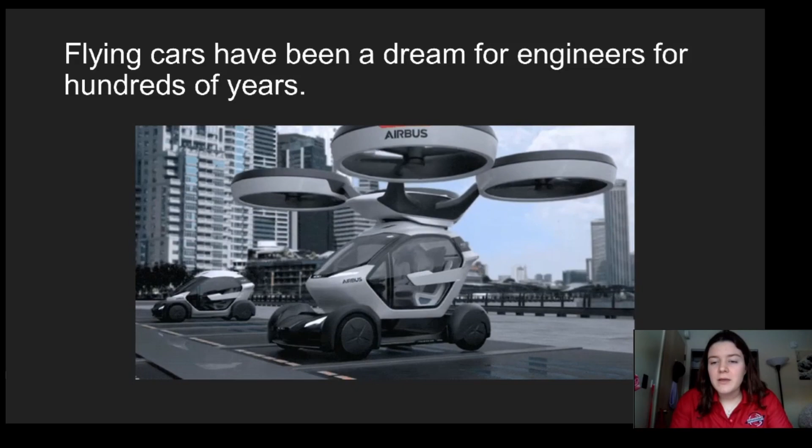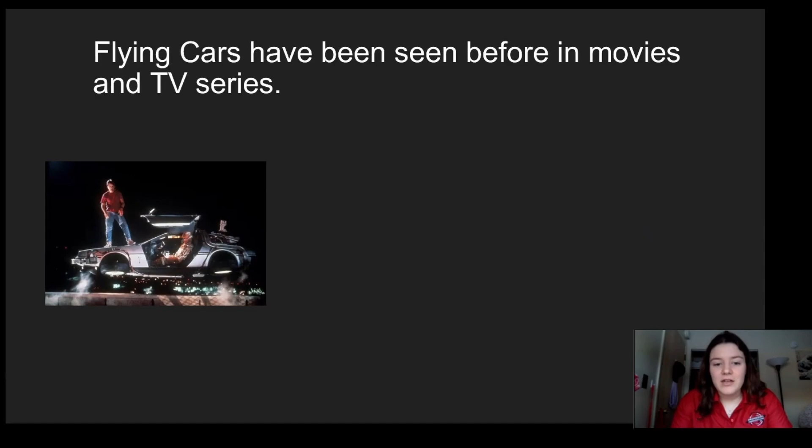Now, you might think that this is way too futuristic and impossible, but there have been examples where flying cars have appeared in movies and TV shows. The first one that comes to mind for me is Back to the Future. There's also the Magic School Bus and Star Wars that are big ones. This concept of urban air mobility is how engineers are trying to make these fictional flying vehicles into reality.

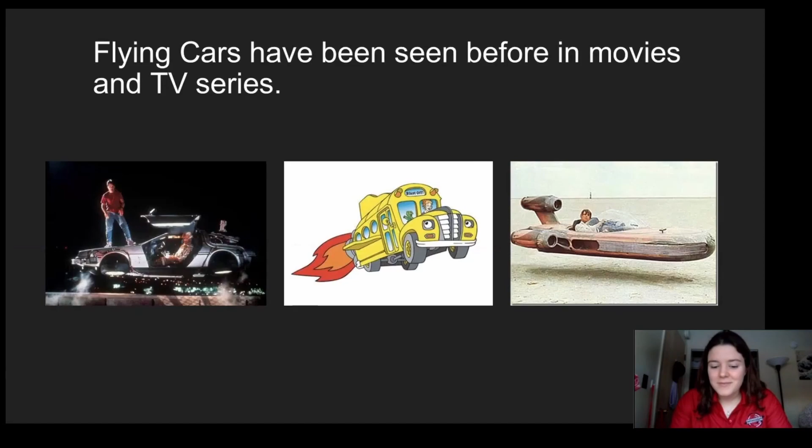So we'll be talking about urban air mobility today. Like I said before, I'm Emily, and Italia is with me, and we're talking about how engineers are creating this new way of transportation to bring people from the cities to the suburb areas through the means of flying cars.

Our presentation is separated into three parts. The first one being urban air mobility, the second one, lift, thrust, and drag, and the last part, the pros and cons of urban air mobility.

Our first topic today is, what is urban air mobility? It is the theoretical name for what is going to be flying cars. It is the future of transportation, mostly its modernization, and it's how people from the city will be able to get home from work after long days, but not on cars or roads, but through the skies and up and above. It's the concept where traffic will be avoided and people will be flown out in a greener way than gas emitting cars.

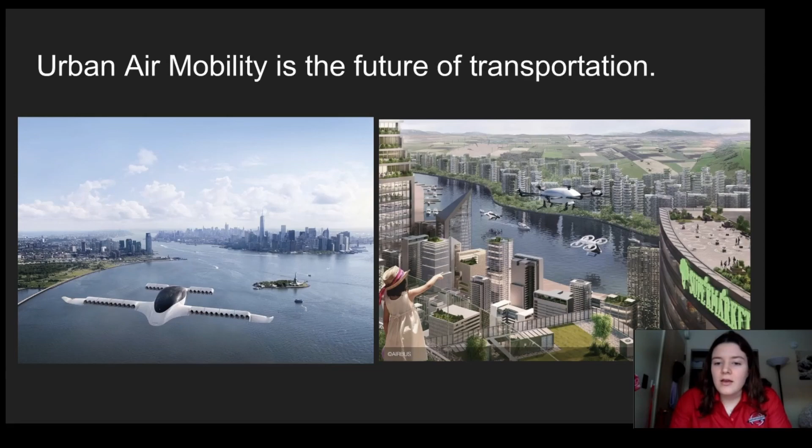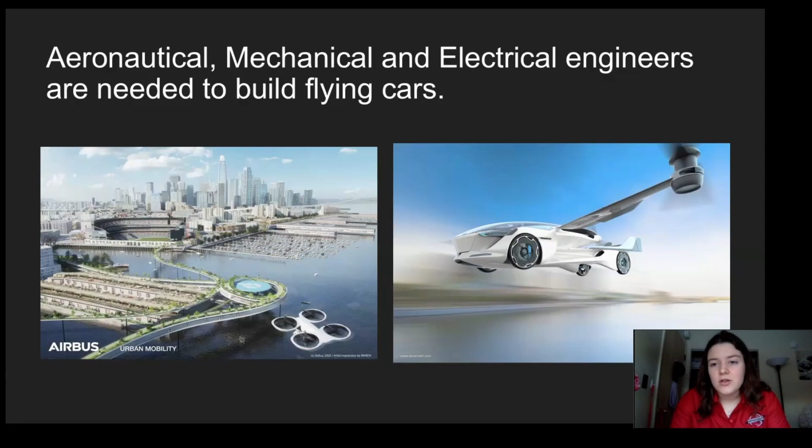There are a few types of engineers needed to make these flying cars. The first would be aero engineers, who are responsible for the aerodynamics of the planes, making sure it's able to fly and stay up in the sky and not fall down. Then there are mechanical engineers, responsible for the motors and engines of the car, making sure it runs. And there are also electrical engineers, responsible for making sure all the systems of the car work together as a whole.

One flying car currently being sold is the Terrafugia Transition, which can fly and drive. The problem is that it needs a runway to take off, which takes away a lot of the appeal and convenience of a flying car. Flying cars will become more popular when we're capable of having a car that can have vertical takeoff, like a hovercraft, but this technology is still being developed. Many rules, investment, and time would need to be made to make flying cars mainstream.

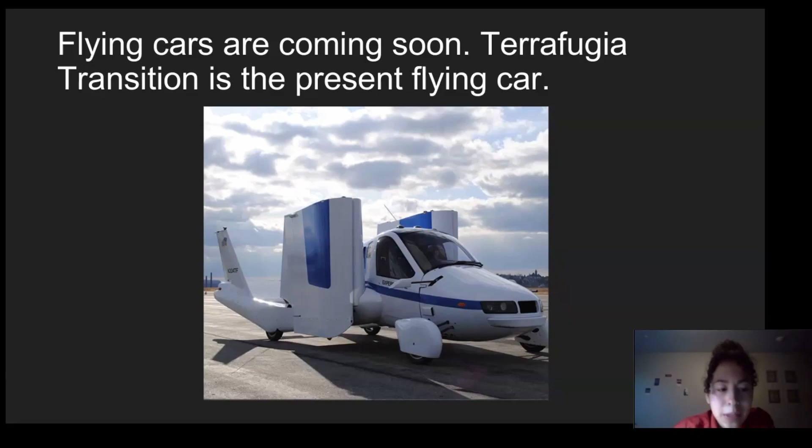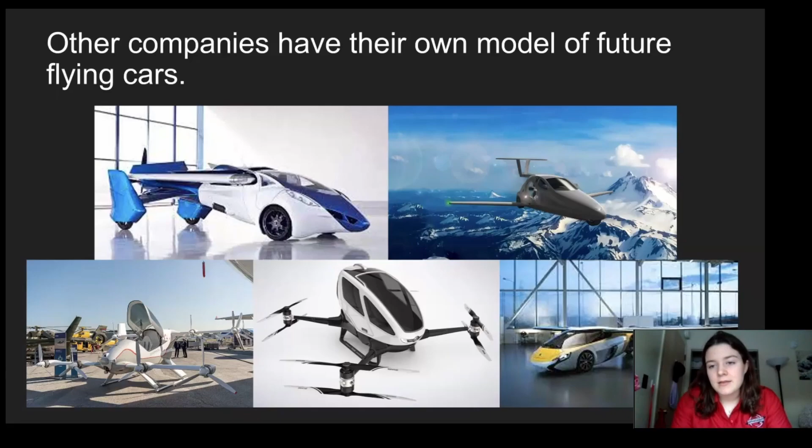All of these cars still require a horizontal takeoff like Italia was talking, so they still take off like this, and the main goal of urban air mobility is to be able to lift up straight and kind of go up and over, which would be best for in-city landing and takeoffs. Now that we talked about what urban air mobility is, the question that engineers are trying to answer is how we can make cars fly.

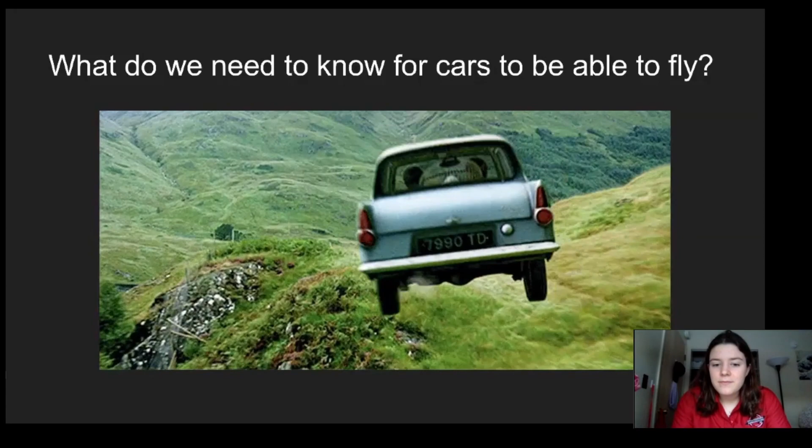So our second topic is explaining the different concepts involved in flying, including lift, thrust, and drag.

First we'll start with Newton's second law, which is a very important equation in physics. Newton's second law is F equals ma. F stands for force, m stands for mass, which is the amount of matter in an object, and a stands for acceleration, which is how fast something speeds up. F equals ma is important because it shows the relationship between forces and motion. It allows you to calculate the acceleration and therefore velocity and position of an object, which would be important if you are going to design a flying car.

This formula tells us that the amount an airplane accelerates is equal to the applied force divided by the mass of the airplane. As you can see with the car in the picture, when you hit the gas pedal, it goes faster because you applied a force. Similarly with the baseball player, the ball is hit with more force and goes farther because he swung the bat with more acceleration.

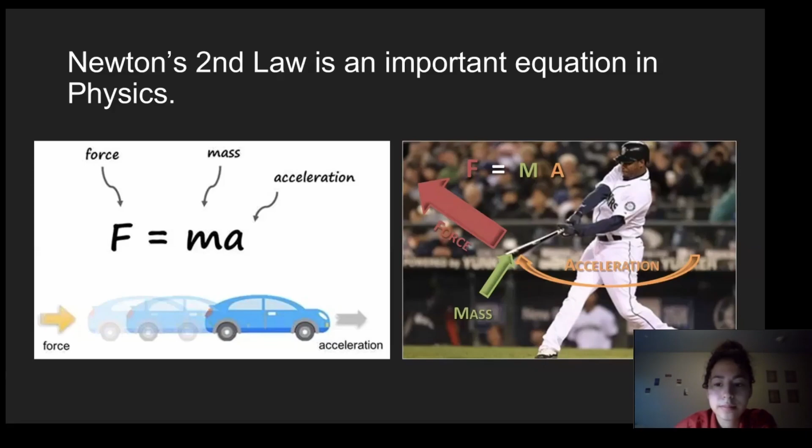Now that we've talked about Newton's second law, we can talk about the fundamental forces of aerodynamics, or what makes a plane fly. First we have lift, which is an upward force that makes the plane go up, caused by a difference in air pressure along the wings. Then we have gravity, which pulls it down, coming from the center of the earth. Thrust moves the aircraft forward and creates airspeed, and that comes from the engines. And drag acts against the airplane, pulling it back, caused by things like air.

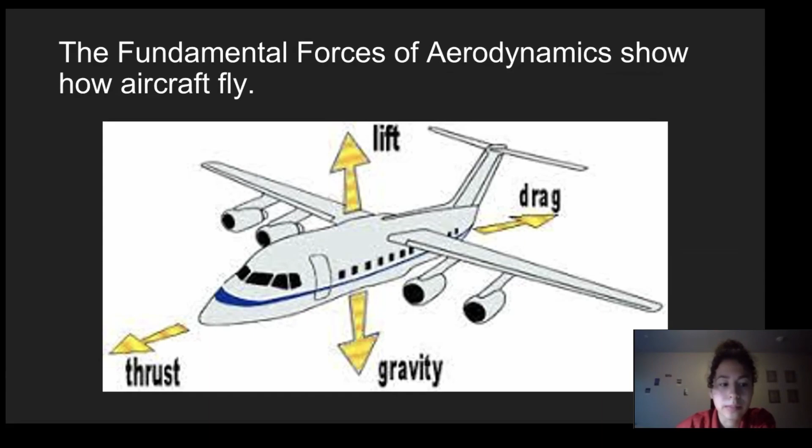The main thing you need to know is that lift must be more than gravity or the plane will fall, and thrust has to be more than drag for the plane to go forward. So as shown by the arrows, you can see which condition has to be higher for the plane to go forward, backward, up, or down.

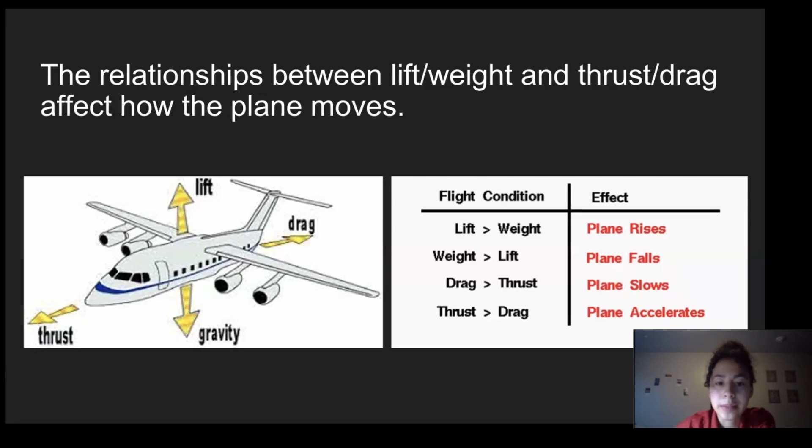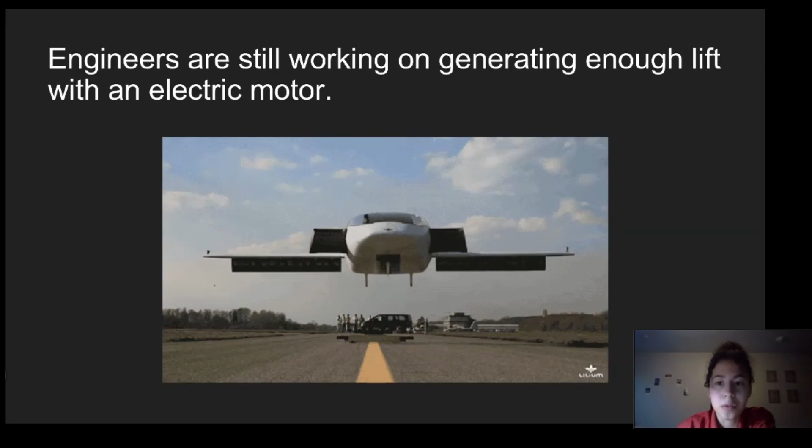There are weight and height restrictions for people to fly the car. The driver must be 18 years or older and take a training course to fly it, and it can only be flown in rural or country areas. The company is working on improving vertical takeoff to accommodate more people's weights.

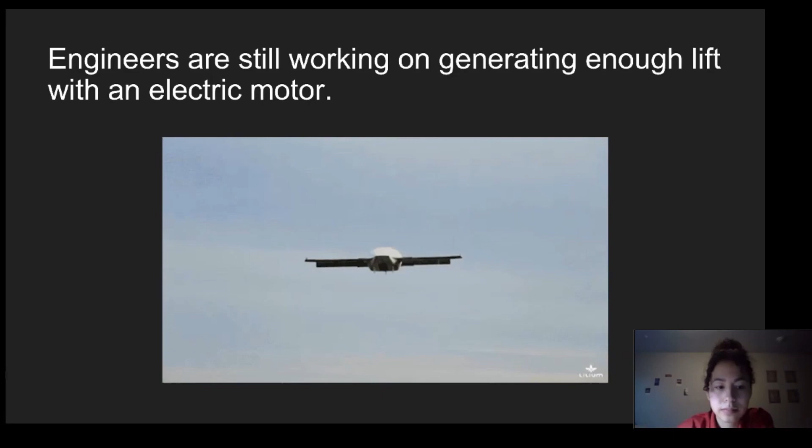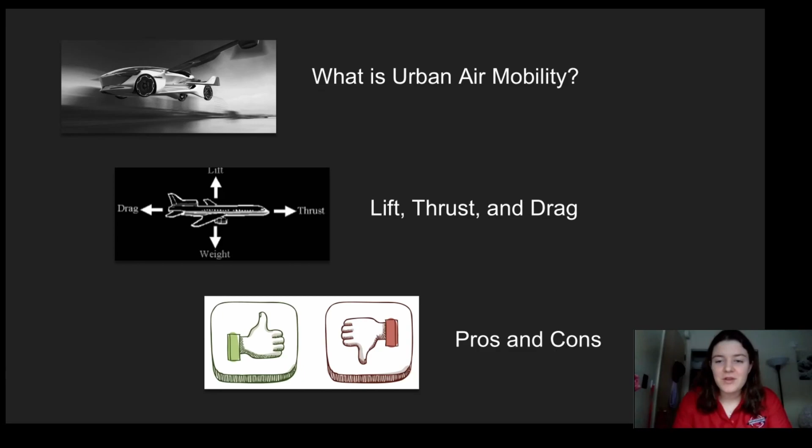The last topic of discussion is the pros and cons that urban air mobility brings to our lives. The first pro is how convenient urban air mobility would be for everyone's lives. It would reduce traffic as there'd be more of a flow of direct routes for people to take home, and it would reduce the density of people leaving the city, making for a more convenient way home.

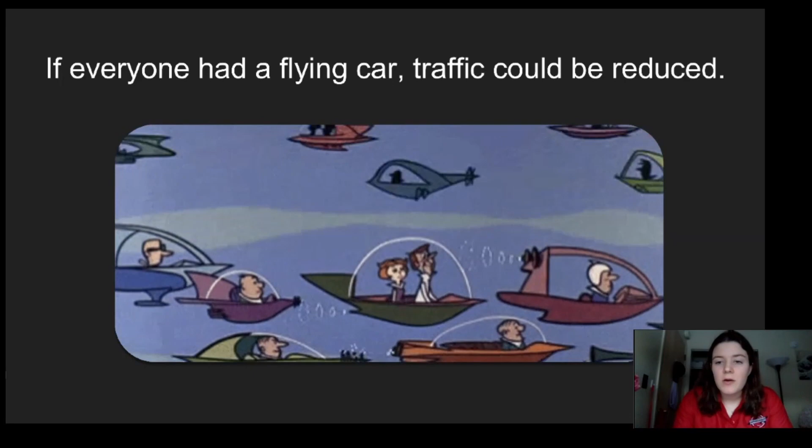The second positive point of urban air mobility is how time-saving it would be for everyone coming back home. These flying cars would be faster than regular cars, and would also have a more direct route to the suburbs with less traffic, which would make for a lot of time saved. And time is money, as a lot of people say. It's more time that parents could spend with their kids at home instead of sitting in traffic.

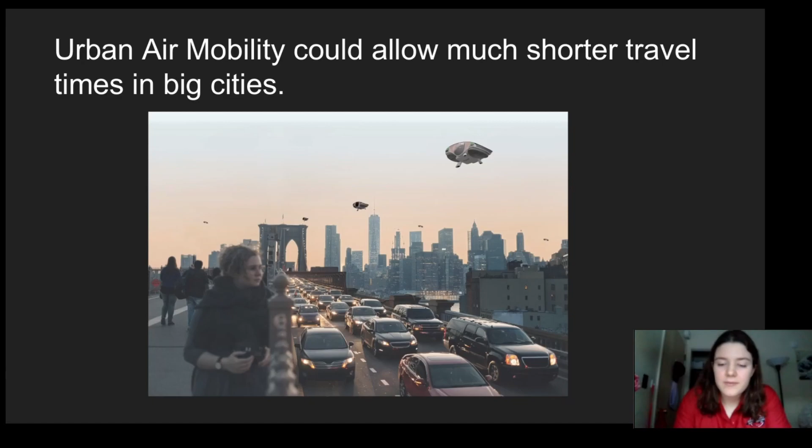The last positive point about urban air mobility is how green this technology could become. This is still being developed, which means there's the possibility for it to be green energy, less dangerous and bad for our planet, which would be better. It'd be more fuel efficient as fewer people would be driving their cars, and there would be less gas emission. So flying cars bring the possibility to make a greener world.

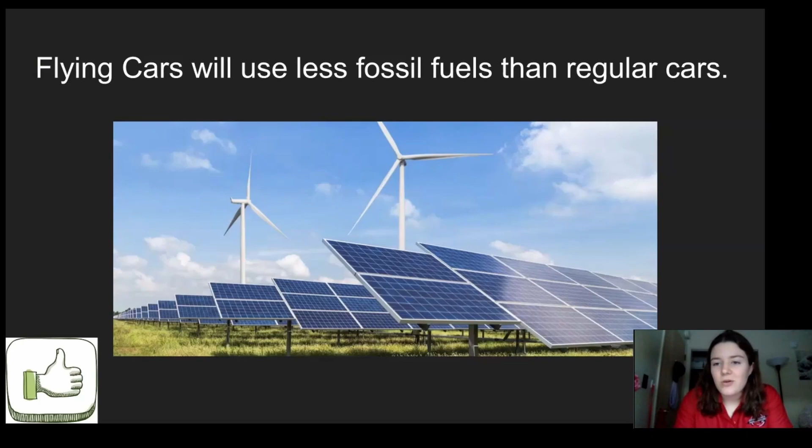Now, I'd like you all to close your eyes and pretend you're at the beach, just sitting, and you hear the whoosh and the calmness of the waves. But then suddenly, there's this big buzzing sound that just goes right over your head, and you wake up with a startle, like, what was that?

This is something I've seen before, and I know probably a lot of you have heard about: drones. Drones are very small, miniature type of flying vehicles, and a flying car would be a lot, like 10 times or more the size of it, and it would make a lot more noise. That is one of the concerns engineers have to take into consideration when they think about building flying cars.

Now we'll talk about the cons of flying cars, or the reasons they aren't popular yet. One reason is noise pollution—it would be noisy for people on the ground, especially people in skyscrapers. NASA, Boeing, and other companies were working on a commercial supersonic plane, a really fast plane, and the main reason it's not in public use right now is because of the noise from sonic booms that bothered people in residential areas or suburbs. So noise level is actually a main consideration.

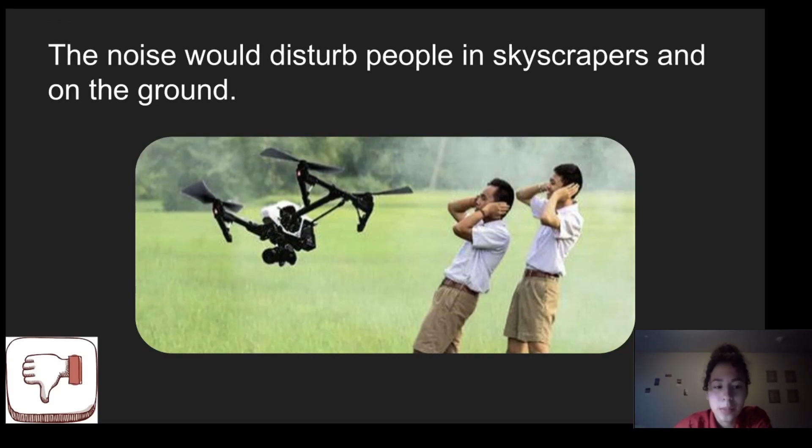Another thing to think about is how expensive it would be to mass produce this invention and create air infrastructure and rules for people to be able to use them. Some rules to think about are who would be allowed to buy or use these vehicles—would it only be taxi drivers or everyday drivers? Would taxi drivers need specially designed flight lessons?

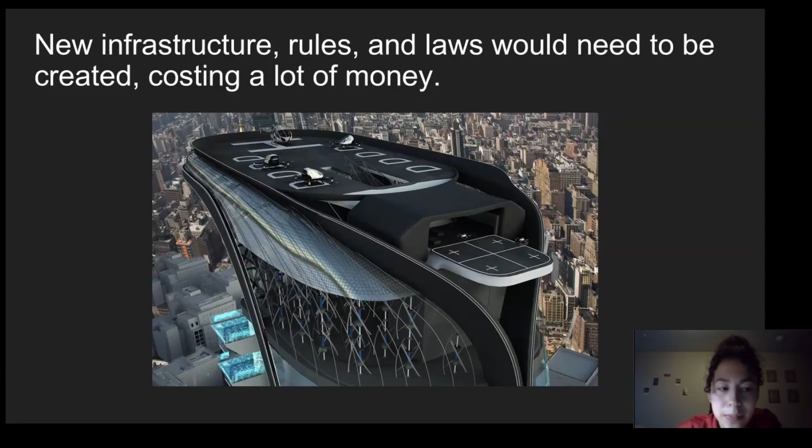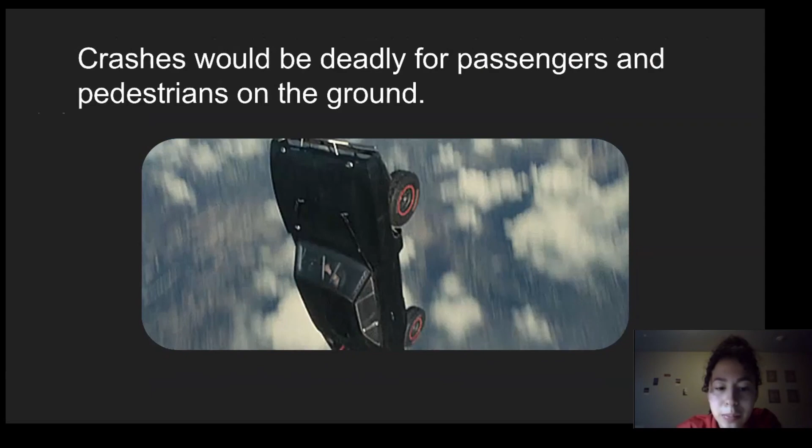The biggest con is safety, because crashes would be much deadlier for people in the vehicles and people on the ground. Some things to think about are: how would we prevent crashes from becoming even deadlier to people on the ground? Would we create barriers or nets to protect people on the street? Would there be an escape option in the event of a crash or failure for people in the car, like a parachute or ejector seat? And what happens to the car if it runs out of fuel—will it just fall out of the sky like this car?

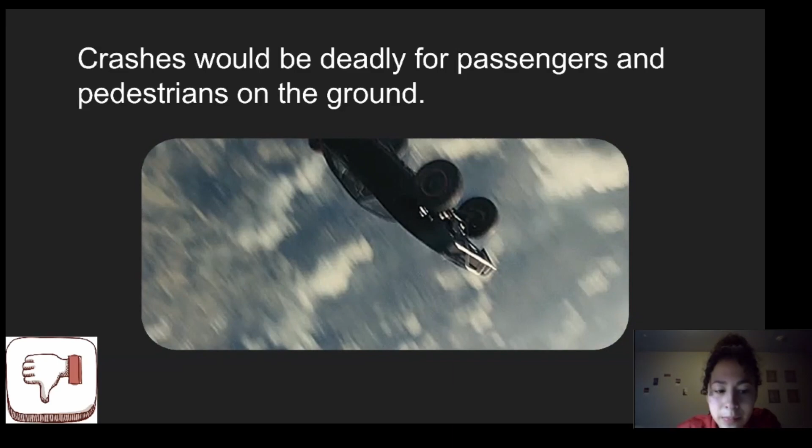So the cons tell us why we haven't made flying cars a reality yet.

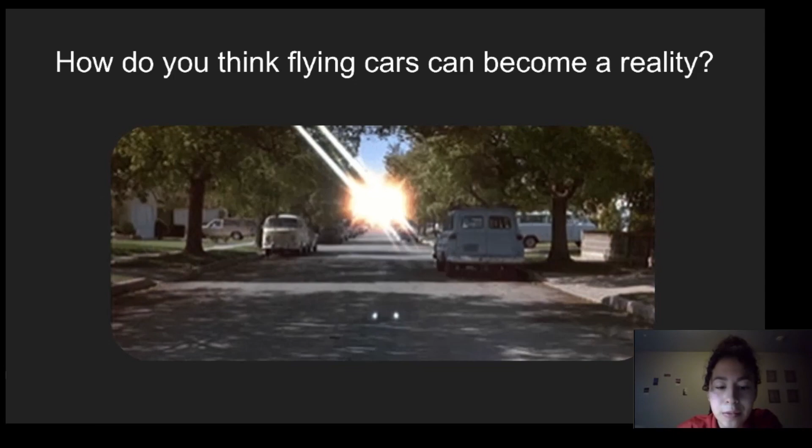So looking back, having talked about what makes a car fly and the pros and cons that come with it, how do you think flying cars can become a reality? You guys are the future, so you can help us figure out how to make flying cars available for everyone.